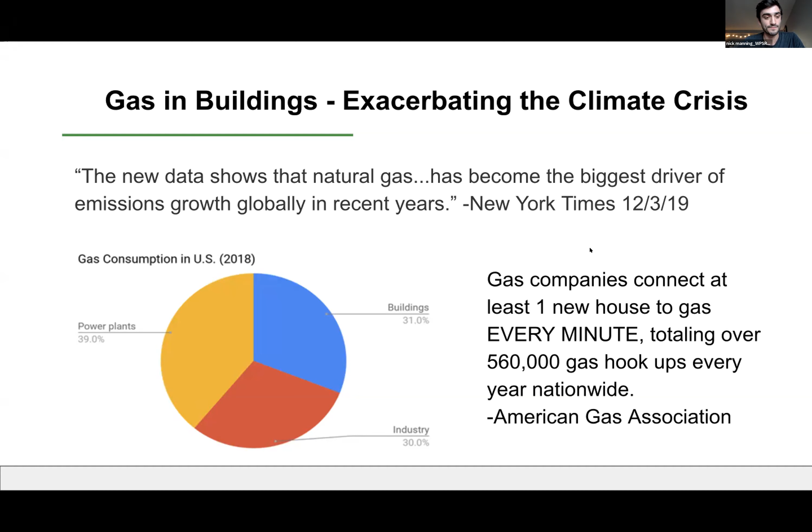In Washington specifically, thanks to our clean and low-cost electricity, swapping out gas appliances for electric ones would be a huge climate win. Reducing the average household's climate footprint by 50% if we swapped out gas appliances for electric appliances is the same as completely giving up your car. So you can contribute to the solution as much as totally giving up your car by switching out the appliances in your home, in Washington specifically, because we have access to a relatively clean and low-cost electrical grid compared to the rest of the US.

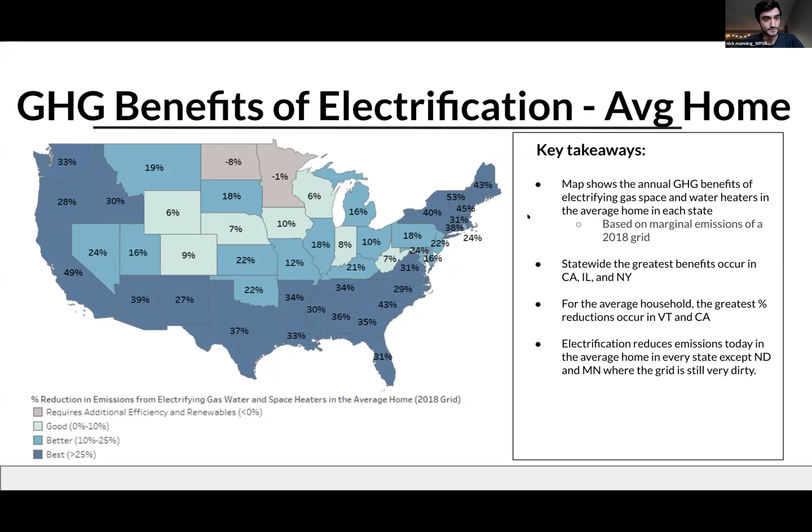Zooming into Washington a little bit more specifically, looking at the trends of gas use in this state, and why it's kind of alarming how quickly the use of gas is growing in the state and the total portfolio that it makes up as a percentage of our total use going into buildings.

In Washington state, you can see on this graph that buildings are the single fastest growing source of carbon pollution, up 50% since 1990, now causing 27% of Washington's climate pollution, which is more than the industrial sector, which is 19%, as you can see on the graph there.

I will note, this comes from gas burned in furnaces, water heaters, stoves, and dryers. So due to gas use in those appliances specifically, we are contributing 27% of our climate pollution by just gas appliances in buildings, and it's growing faster than any other source of climate pollution in the state.

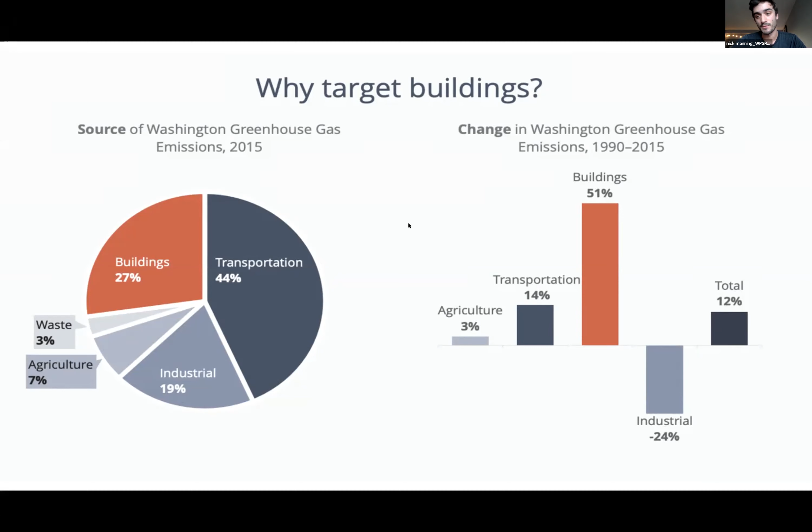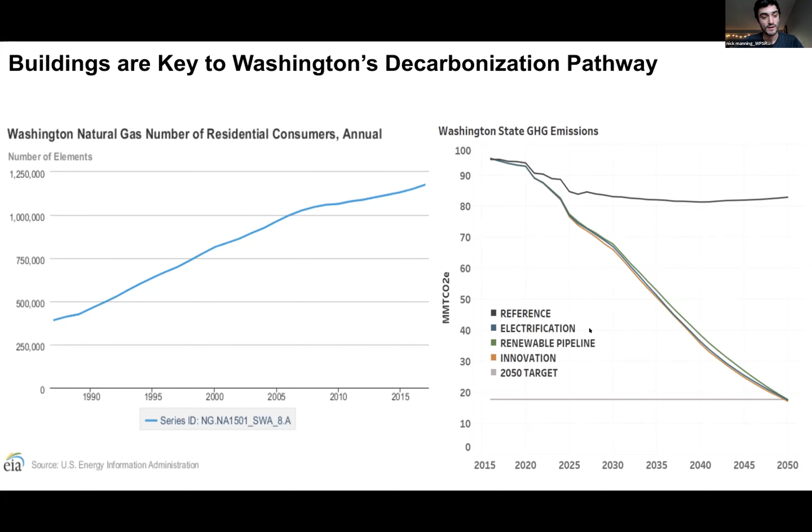Specifically, reducing the residential sector's use of gas by 85% is the target to get to where we need to go as a piece of the larger climate decarbonization pathway in Washington. This is a huge piece of the puzzle that needs to get figured out soon if we're going to keep on track with what we've promised.

Next, please. And that's the climate picture in a nutshell. There's a lot more I could say about that, but I don't want to harp on it. I'm sure you guys are getting information from many sources.

So I think I'm going to pivot and talk about what we do as Physicians for Social Responsibility, as an organization that organizes health professionals. We're really concerned about the health impacts.

There's a growing body of literature, and it seems like new stats and studies are coming out weekly, attributing really concerning adverse health outcomes to increased use of gas indoors and indoor air pollution. In the United States, we estimate that air pollution from buildings specifically contributes to $205 billion in costs annually. That's healthcare costs, lost work days and sick days, all the different impacts that come from being overly exposed to indoor air pollution that might make you sick, make you unable to work. All that aggregate is 205 billion annually, which is an enormous overlooked piece of this issue, I think.

And if you go to the next slide, we see that premature deaths attributed to air pollution from buildings are estimated to be over 18,000 annually. So homes and buildings are now the largest source of toxic air pollution in the US, and it's linked to a greater number of premature deaths in 2018 than either the power or transportation sectors, according to a study in Nature.

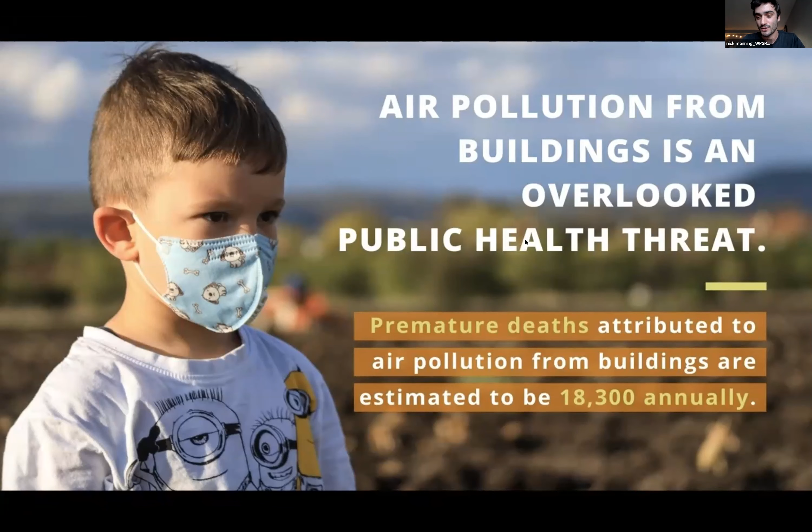By the way, if I say anything that folks would like to follow up on, if it sounds crazy or you're wondering where it's coming from, I have references for all these. Please feel free to follow up, and I'm happy to tell you where I'm getting my numbers and where this data comes from. I've got resources to share if you're curious to get more into the weeds about some of the actual data. But I say that because of how concerning and outlandish this sounds, that buildings are now killing more people annually from indoor air pollution than either power generation or transportation. Transportation has been the big piece that we've been trying to fix for years, and this has kind of sneakily overtaken it in terms of cost to human health and human life.

Next slide, please. So I'm going to turn to gas stoves specifically. There's 3 appliances that we're really focused on: gas stoves, and then space and water heaters. So I'm going to talk about gas stoves first, and then I'll do a little bit on space and water heaters.

But very quickly, we found that emissions from gas stoves include that whole list you can see in the box above the gas stove on the left: nitrogen oxides, carbon monoxide, particulate matter, ultrafine particles, formaldehyde—all chemicals that have been linked to really dangerous health outcomes in people, and they're listed here. I won't bore you by reading all of them, but we're talking about very serious heart and lung conditions, very serious brain conditions, especially in kids and the elderly.

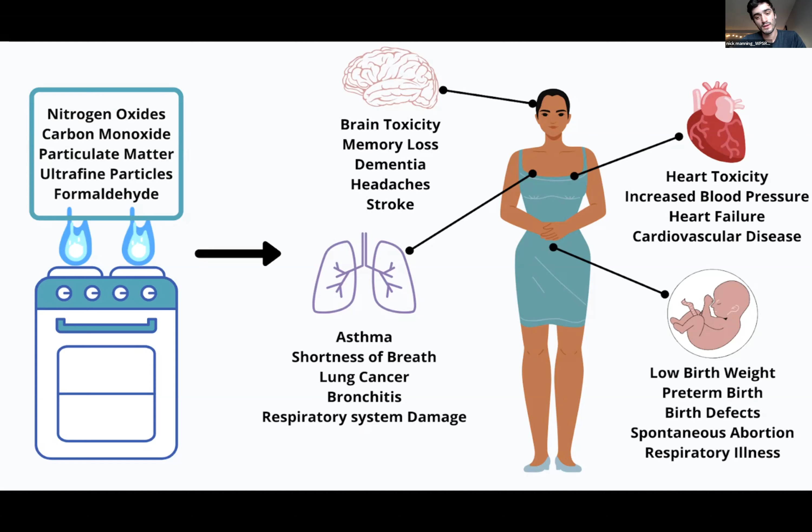In fact, homes with gas stoves have 50 to over 400% higher nitrogen oxide levels in their indoor air than homes with electric stoves. And nitrogen oxide has been linked specifically to heart failure and asthma, very empirically. I'll get a little bit more into that in a second. But then the stoves also emit carbon monoxide, which obviously is a huge problem. Carbon monoxide is an incredibly toxic chemical that we don't want anybody breathing in their home, and it's coming from your stove. So next slide, please.

We are not paying as much attention to indoor air pollution as outdoor air pollution. In fact, levels of indoor air pollution can reach concentrations that would be illegal by EPA standards outside. That's regularly documented, largely coming from gas stoves. We know the risks. We've well documented the medical pathways from exposure to outcome, and it's especially damaging to children, lower income households, anybody who's immunocompromised, and aging populations. Two last pieces: ventilation is critical, but really what we need is electric cooking to transition to something safer and friendlier to the climate, so we're not putting people and our environment at risk.

Ventilation is a piece of it, but we found that to really get at these impacts, it requires swapping appliances to electric appliances.

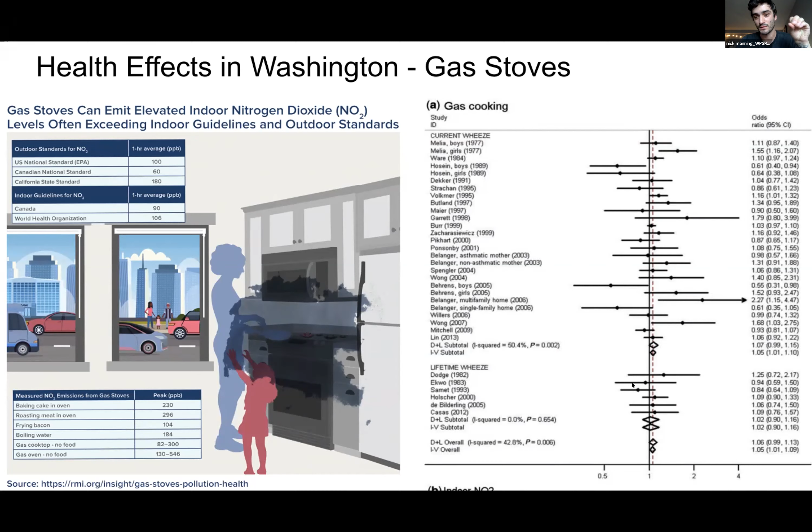I should mention that data includes gas and wood smoke being 20% of the total making up those figures. That's still a huge number. It's extremely concerning as far as premature deaths go and the cost of human life and human health. And we're not really doing anything about it from a policy perspective, specifically in regards to protecting the health of our kids.

Moving to space and water heaters, less documented than gas stoves. A lot of data and clear causal pathways have come out of studies specifically regarding gas stoves. For space and water heaters there's more limited data, but I found 2 case studies that might be interesting. In South Australia and in India, there were 2 deaths from carbon monoxide poisoning traced back to faultily installed water heaters.

In fact, in the 2 individuals studied in this case study, they had carbon monoxide levels of 55%. The normal level is about 2 to 4; 50 can kill you. This happened because the water heater, which operated on a pilot light, was improperly installed—it was switched off, but the gas wasn't totally turned off, and that leakage over time released carbon monoxide into these individuals' homes until they reached a fatal level and died.

So clearly there are risks associated with all gas appliances that we need to consider. Just having gas inside, the indoor air pollution, and not looking at the consequences as closely as we should is a really big concern for us, specifically at WPSR.

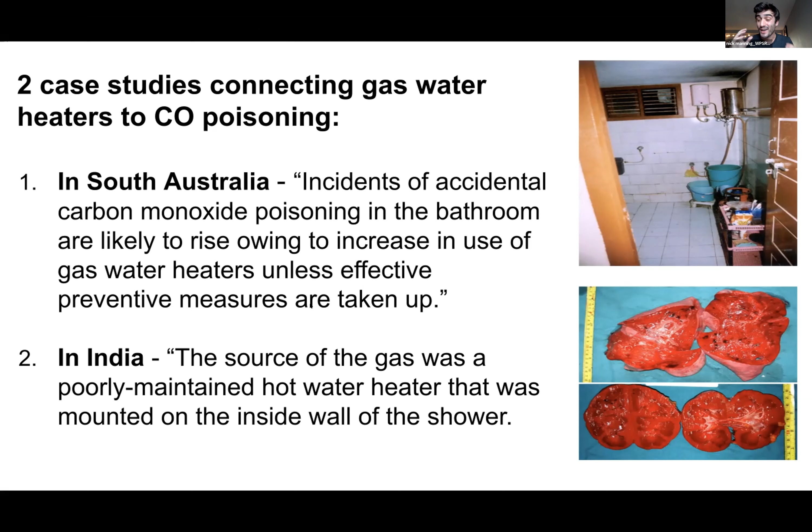And that's sort of the health data. There's more, and I'd love to talk your ear off for as long as you'll let me about how many adverse health outcomes we're associating with gas stoves and water and space heaters, but I'll leave it there. The real takeaway is that this is now contributing to more health impacts than any other sector in our state, from any other fossil fuel in our state, and is growing faster than any other sector in our state, and is largely unregulated as of yet.

With that, I'll give it to Dylan.

Thanks, Nick, for that very sobering overview of the health impacts. It's pretty astonishing. As a renter myself who lives in a house with a gas stove, learning all of this has been kind of terrifying, and I think it's illustrative of the situation a lot of folks are in our region, which is not having the ability to transition away from gas, even though we have an understanding of the climate and health impacts.

I'll talk a little bit about some of the policy levers for that shortly, but I want to first start talking about building electrification and what it looks like. So we've heard about all the negative impacts of using gas in buildings, to our climate and to our health, and we've heard a lot about the oversight from our different levels of government about regulating these appliances based on those impacts.

But there are some really effective means by which to reduce emissions, protect health, and even save households money. So building electrification is a growing movement, as I'm sure many of you know, and many of you are at the forefront of it.

This graph is just a helpful illustration as to where a lot of the gas in homes is being used. You can see that while cooking has an outsized impact on health, it's really a very small percentage of the carbon emissions related to gas appliances, whereas space heating is the vast majority, followed by water heating. This is a helpful graphic, especially as we start to talk about some of the policies that cities have taken in light of the carbon impacts of gas appliances.

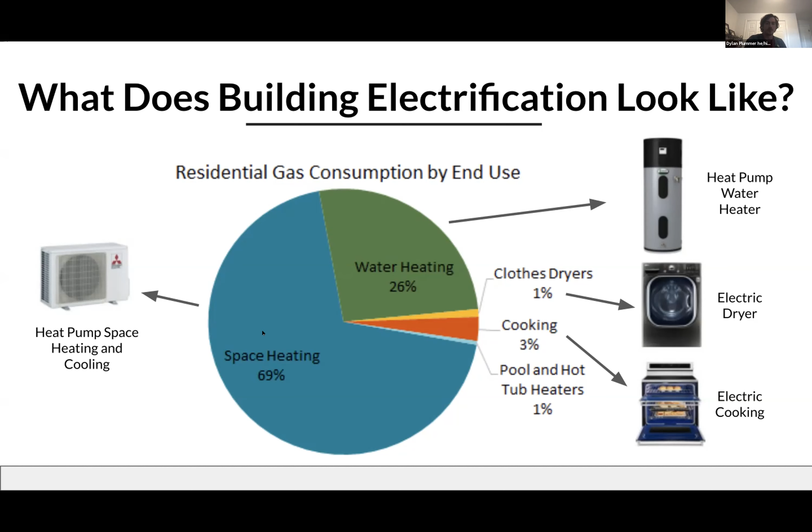This is actually something the presenters coming after Nick and myself will likely speak much more articulately to, but all of the alternatives to gas appliances in homes, ranging from induction stoves, heat pumps, and electric water heaters, are becoming increasingly inexpensive and efficient, making the transition away from fossil fuels in buildings that much easier, not only for clean energy enthusiasts, but for folks concerned about their health and safety from these gas appliances.

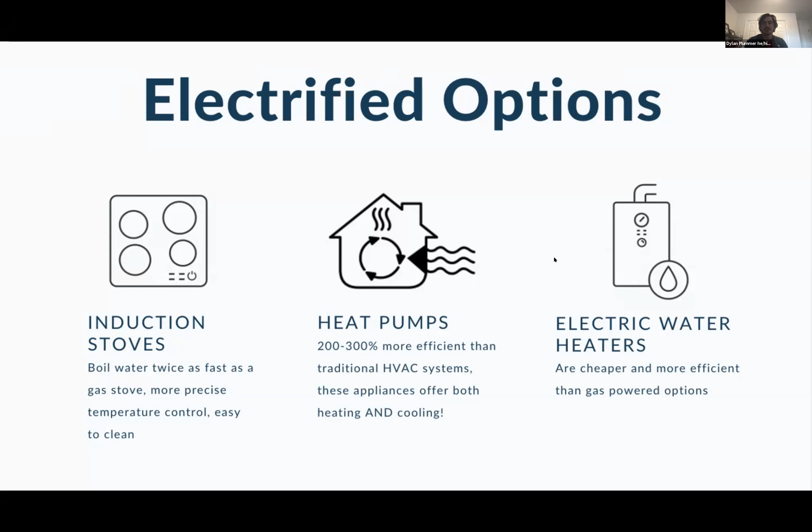We've heard a lot about how there's very little regulation, but there is a growing movement specifically across the West, and now increasingly across the country and the world, to take on the gas industry and take on these gas appliances that are polluting our homes and our climate.

Just recently, in the last few years, over 45 cities have adopted all-electric building codes. That all started when Berkeley, California passed regulations on building with gas hookups in new buildings. Within two years, dozens of cities in California, cities in Washington including Seattle, and cities like New York City and Denver, all took measures to put limitations on building with new gas infrastructure and incentivizing using electric.

So 11 states plan for building electrification to help achieve state climate goals, including Washington and Oregon, which is really exciting. As Nick mentioned, the 2019 Clean Buildings Act in Washington was a great step forward, as was the executive order from the governor in Oregon to limit emissions. There are 11 states working towards building electrification in multiple venues, including their public utility commissions. Both Oregon and Washington are now engaging, or about to engage, in fact-finding about the future of gas for their public utility commissions. So that's really exciting.

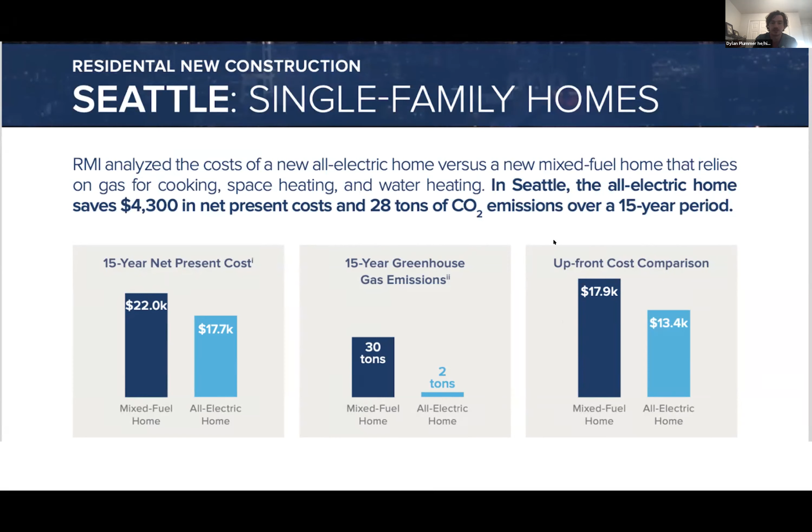I also wanted to point people's attention to this Rocky Mountain Institute study on Seattle, which I believe came out in 2019 or 2020. It looks at the 15-year savings, and shows that building electric can save a homeowner $4,300 in net present costs and 28 tons of CO2 emissions over a 15-year period, which is really significant. So not only is electric building the safe and climate-friendly choice, but it's also a good choice for the pocketbook.

And I did want to just hit on this. I know it's a little bit of a tangent, but it's always worth talking about.

The gas companies are selling us this false promise of renewable natural gas, RNG, biomethane, and sometimes green hydrogen as well, but that's a little less common, saying that they're going to be climate friendly in the next 10 or 15 years because they'll have replaced all of the gas in their pipelines with biomethane, which is generally generated by polluting infrastructure like landfills, water treatment plants, or even CAFOs, mass animal agriculture places. And there are many studies that show there's no way to even come close to hitting a third of the current demand for gas with renewable natural gas.

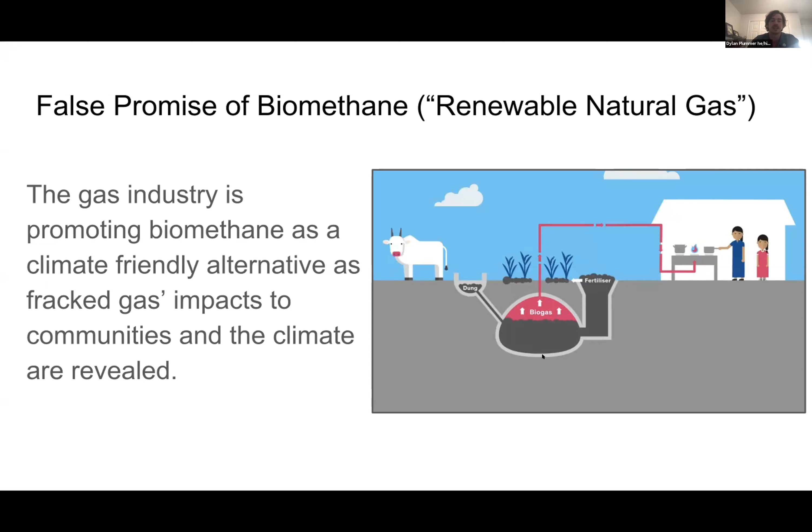It's incredibly expensive, and there are a lot of environmental justice concerns. But what we know is that the gas industry is not really interested in pursuing renewable natural gas as a viable alternative. They're just interested in using it as a pretty distraction for policymakers while they continue to expand their gas infrastructure and expand their sales, locking us into an out-of-control climate crisis and public health crisis, as they have been for decades now.

So despite what the industry would tell you, the fastest, most equitable means by which to decarbonize our society is not to invest in more CAFOs, sewage treatment plants, landfills, et cetera, but instead to electrify everything and transition to clean, renewable energy in our homes.

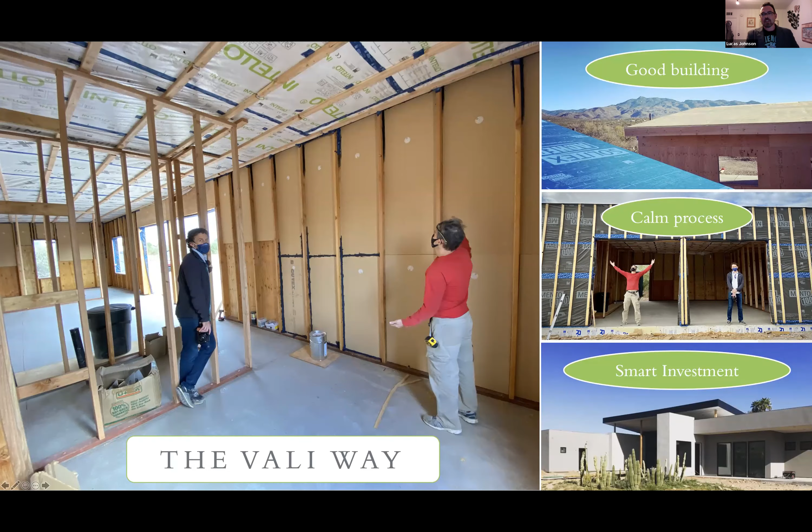Good building, what is that, you ask? If you haven't seen this before, we've broken it down to 5 factors that have a ton of different sub-factors. But effectively, we're in the decision-making processes that we've done. We're looking at comfort and health, efficiency and renewables, durability and resiliency, social equity and embodied injustice, life cycle carbon impact.

Those are the 5 main things we're looking at in decision-making processes we've done. This has been a powerful methodology, so we're hoping to turn this into an open source design tool that anyone can use through my relationship with the Guild and all that. Hopefully this can become a Guild product. I hope to share this system, this thought process, because in 20 years of doing this work, I haven't found a conversation tool that's more effective in getting people to see the whole system and make the right decisions.

So I decided to apply it to cooking, a conversation we have all the time with clients. It feels like stoves are the last bastion of gas inside homes. People are like, I'm a cook, I have to have this gas stove. And it's like, really? You don't. It turns out most cooks are moving towards induction anyway.

But there's also a whole horrible life cycle you're tying yourself into by choosing to have gas in your home. A lot of people do all electric but a gas stove. Cool, step in the right direction, but you're still tied into this system. I chose this dangers of fracking image because it was the scariest looking thing I could find. But my point is, you're inextricably tied into a system that has tremendously high carbon impact.

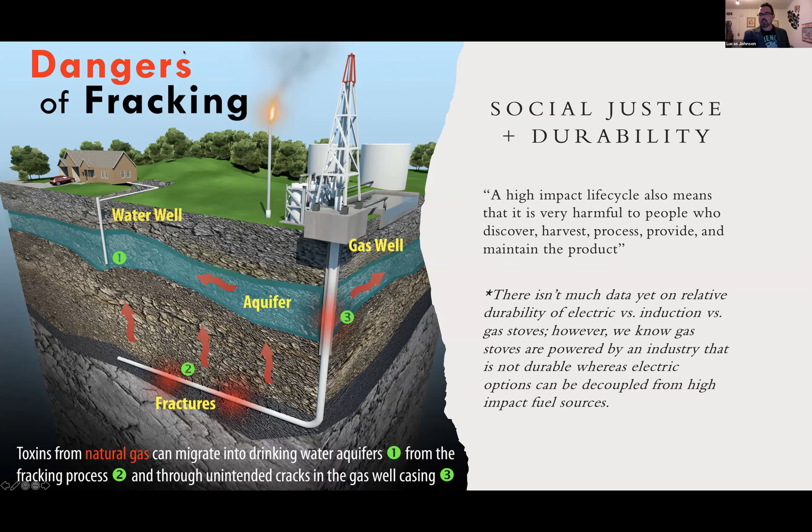Health-wise, natural gas decreases overall indoor air quality. Thank you so much, Nick, we're going to need to talk. I'm fascinated by learning more about the data you have on this. It's kind of hard to find a lot of publicly available data in this area, but it's very clear that natural gas is adding pollution to your building.

If you go camping, you're using natural gas basically in a stove that says do not light this indoors. Yet we put a giant, 300,000 BTU Wolf massive stove in our house that requires a ventilation hood that could suck a cat off the ground in order to remove that amount of pollution, and think that we're doing something worth doing, that's safe, that's healthy, that's good for us. It's kind of a crazy thing.

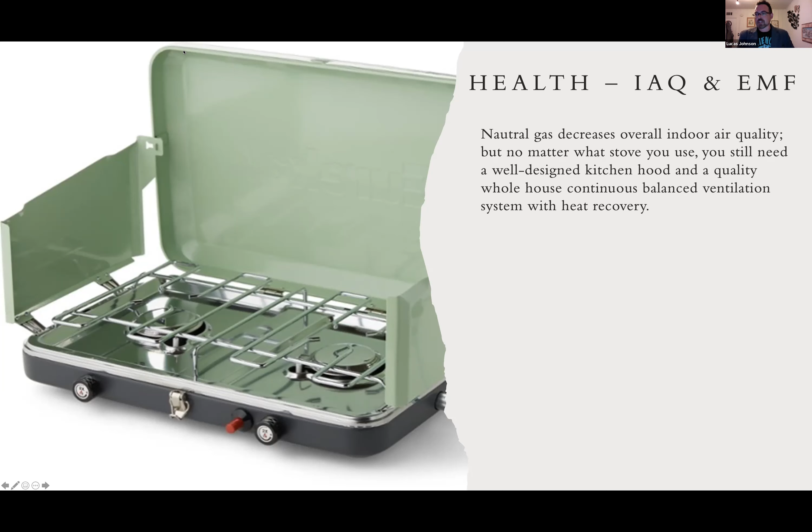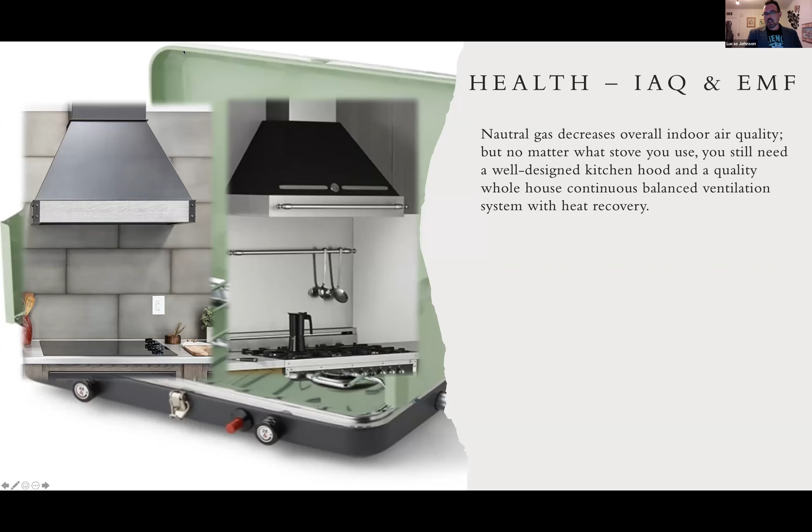But what the data shows is that no matter what stove you use, electric, induction, or gas, what you do need is a well-designed kitchen hood and a good continuous whole house balanced ventilation system, ideally with heat recovery, so we're not wasting a bunch of energy to create good air quality. What you can see here is that the kitchen hood looks almost identical in either of these setups, with a gas setup or an electric setup. You still kind of end up with effectively the same utility.

There are some emerging concerns about induction stoves and the degree of EMF they put off. Everything I've found was not really sufficiently scientific, is the way I'd put it. But there are some good points to consider about exposure to EMFs in general, especially as we move towards electric houses. A stove's a large appliance, it's going to have some degree of electric power, and that can be bad for us. But is it really that bad? And is it worse than any of the other options we have?

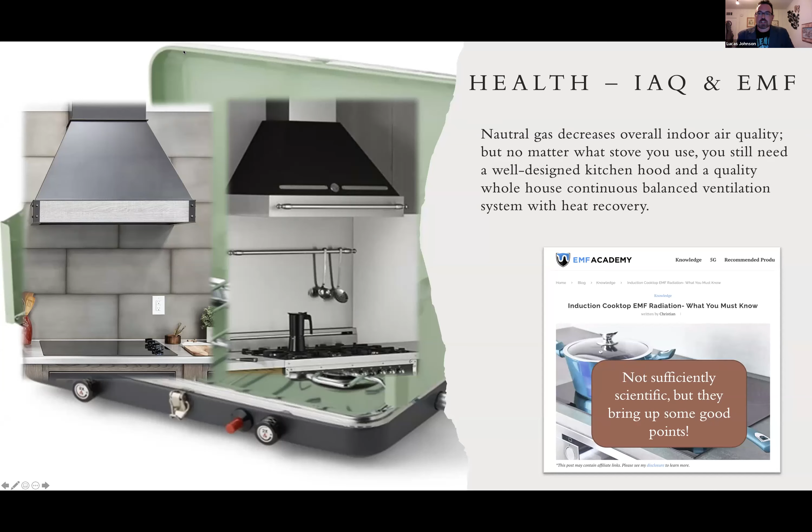Interesting things to think about. And comfort, another one of the things we always consider. These are thermal images from my mom's house during the heat dome when it got to over 90-degree air temp inside her house because she doesn't have air conditioning. Just trying to stay cool was a very, very challenging thing.

But she'd actually just switched to an induction stove, which she loves. She's very passionate about cooking. She views induction as an upgrade she did purely because she prefers to cook on it. But it turns out we could also cook comfortably on it, even when it was over 90 degrees inside, because the stove isn't putting off a ton of heat.

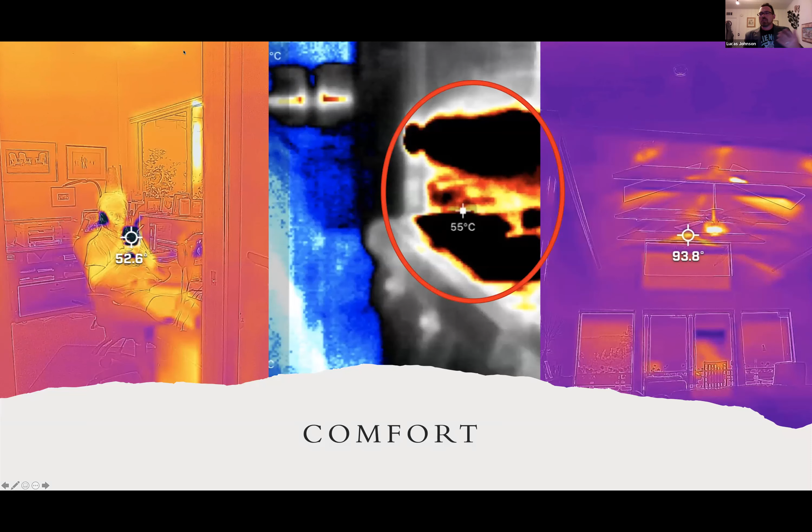This image in the middle, this blurry craziness in the front, that's a gas stove putting off a bunch of waste heat. Not great. And all of the pollution and other stuff coming off of it, all the horrible air quality, all the life cycle violence you're tied into, all of that. It's kind of an appropriate looking thing. It looks like a furnace or something.

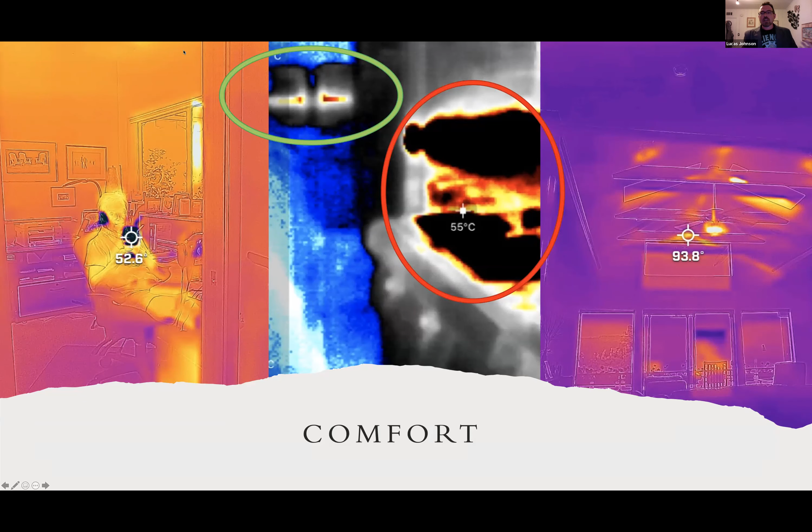In the back, that's an induction stove operating to also cook food. And it just goes to show the level of waste heat from the two different things. If we look at waste heat as an indicator of modern technology advancing, clearly the induction stove is part of a modern good building.

They're also quite expensive. You can find less expensive ones. I've had a really hard time finding a lower cost middle market one that's good quality and well reviewed. If you find one, please put it in the comments, let me know, because seriously, that's the next thing we want to buy.

There's also a great way to get started if you don't have the budget to drop like $8 grand on a stove, which I certainly don't. You can get an induction hot plate, a little thing you plug in and start cooking on it. And these things are getting incredibly sophisticated. I was cracking up earlier when I found one controlled by Bluetooth with algorithmic settings for different meats and temperature sensors in the pan. It's kind of fun where this technology is going and what it opens up for cooking options, because I'm very passionate about my food and cooking, and so is my wife.

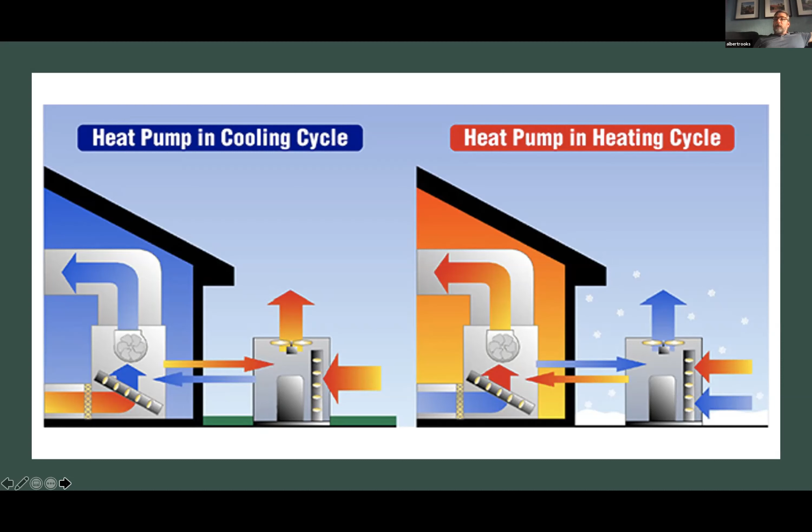It's blasting it out the top of the unit through that chimney across the fan. So you've got a little air cycle of the red arrows running in the cooling cycle, ambient energy coming in and going out the top, while a refrigerant gets pushed to the inside and pulled back on the outside and goes through an expansion. And there we go - we can provide lots of heat without burning any combustion gas, and we can cool homes. So that's really the trend we're looking for in electrification, and we can do most functions in a building using this basic refrigeration concept.

When we talked about this meeting, I was asked to talk about it from a personal standpoint, so our company began becoming interested in taking on a number of heat pump products. We took on a new line that is made in China by a company called Midea. This is just kind of context for why we're doing what we're doing and what products people can choose to use.

There's lots of really good ductless mini splits - lots of great ones by many, many companies. The one thing I like about this one, the reason we chose to work with it, is that outlined in red.

That's an efficiency rating in a cooling application. And below it, where it says 14.5, that's an efficiency rating in a heating application.

Usually in the industry, when we look at ductless mini split applications, really good ones, we'd see that number would be more like 22 or 24. So when that turns into a 40, that's really, really high. That basically means we'll need a lot less electric energy to do the same amount of BTU.

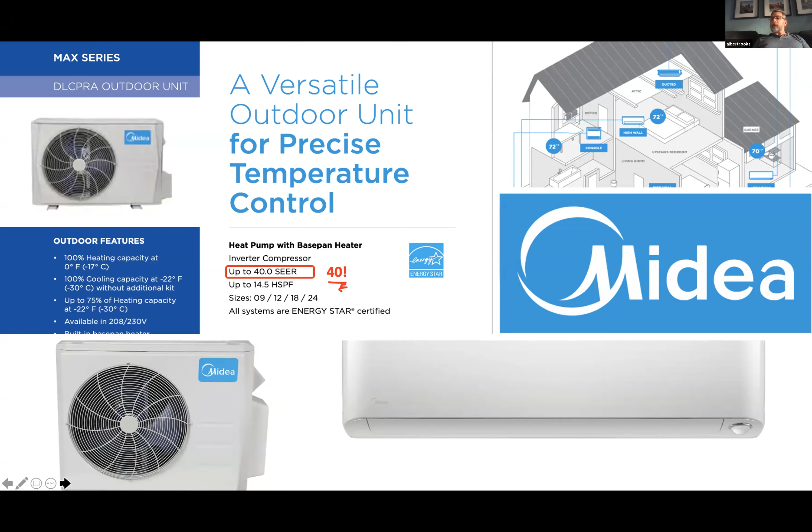There's transitions going on with the refrigerants that are being used, which brings me to the next one. This is one we're just onboarding right now. This is a company from the East Coast USA called SpacePak, and I'm interested in 3 of their units.

The 2 units are shown right here. I'm interested in these because usually these kind of North American R410A monoblock heat pumps, like SpacePak, Chiltrix, or something like that, generally don't have inverters. They're a little bit power on and power off, so they're not really very good at feathering the loads in and out.

This is a really good, efficient inverter technology. This particular series of heat pumps will work in very cold climates, much colder than we'd experience in Western Washington. They'll work fine in Eastern Washington, and even in a colder area like Northern Idaho, where it gets really quite cold, there's even a colder climate option also.

So the last one we looked at is a mini split. The way these mini splits work is we run a whole bunch of piping around the house carrying the refrigerant, and that's what delivers that transition. This is much like the next heat pump we're going to look at, which uses water as the refrigerant line.

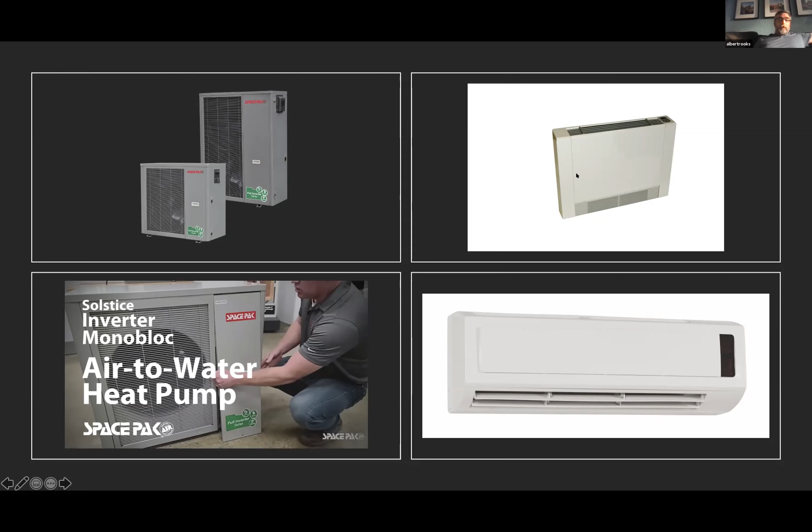So we're not running this high global warming refrigerant around the house, and it still does all the basic functions of a heat pump, delivering over here with a high wall head or a fan coil on a low wall over there also.

Next thing we're going to look at is really the Sanco2 water heater. This is really one of the early products that we started with. It's an exciting product, and it's capable of heating all the domestic hot water for a small single family home. You can also heat a very small home while making all your domestic hot water.

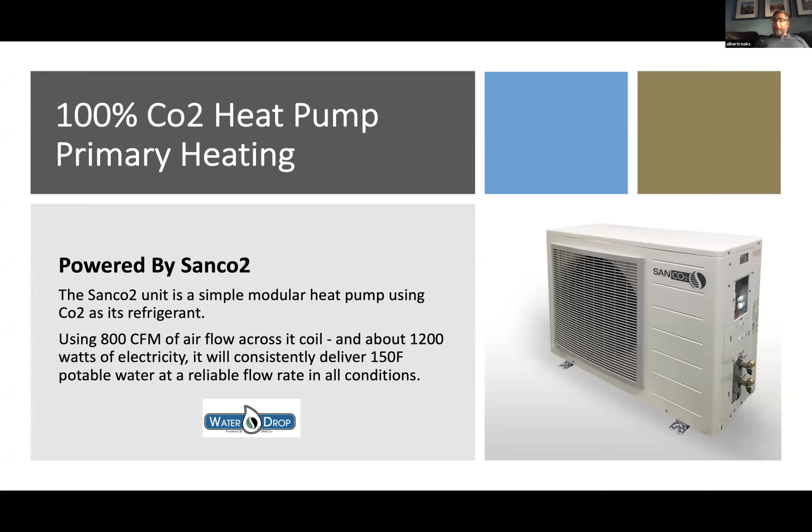But the cool thing for electrification is that through a few years of research with Bonneville Power Administration and Ecotope in Seattle and a bunch of utilities in California, we've managed to find a way to gang all these water heaters together with some very large tanks and take on all the domestic hot water of very large buildings.

Here's one in downtown Vancouver, British Columbia, Canada - a 27-floor office building that we just switched from natural gas over to this heat pump cycle. The nice part of this is that we can handle single family buildings for space heating, water heating, and also handle very large buildings, all with heat pumps. Heat pumps are really very simple devices, and we've got some really good tools to work with.

How about if I turn it over there, Nina? Oh, sounds great, thank you so much, Albert. That was awesome. You're welcome.

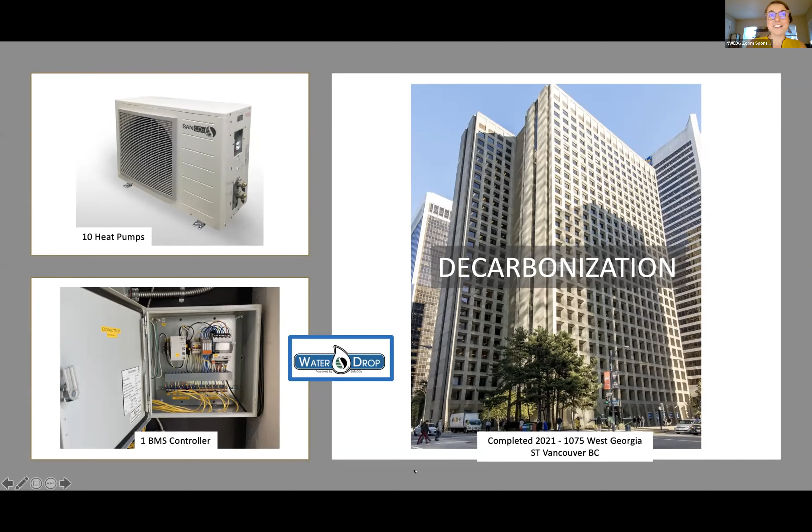Nice. Awesome, John, your slide looks good. I just don't think we can hear you - are you unmuted? You talk, there you go. Okay, and then my presentation slideshow... In the beginning, there we go. Okay, I'm good to go.

Thank you everybody. I'm giving two different presentations. The first will be about holographic and non-holographic electric fireplaces and stoves. This presentation was actually prepared by Brian Cloward, an architect who has a passion about it, but he unfortunately was not able to attend tonight, so I was gifted this presentation this afternoon to present. I'd never even heard of electric stoves and fireplaces that are super sophisticated and actually holographic until we started researching for this meeting - it's a very interesting type of thing.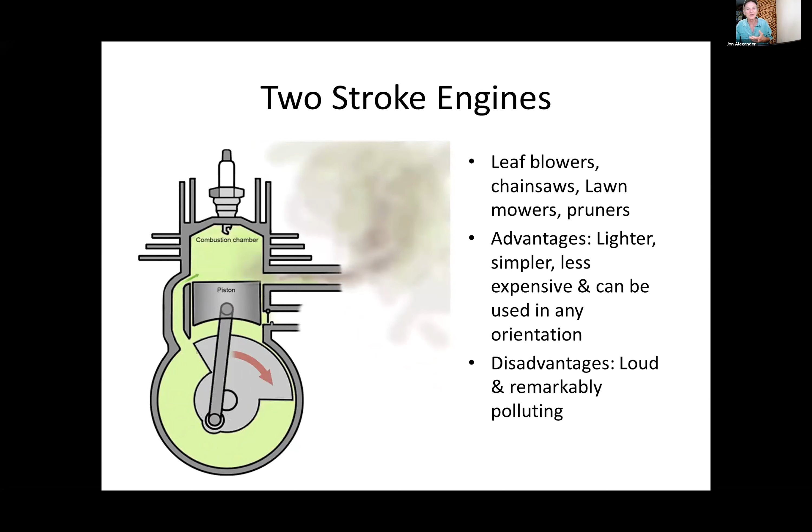Very inefficient. So when we get into electric leaf blowers, here's my show and tell. I have my little electric leaf blower, which has some sound to it for sure. Since I have many different Makita tools, it works super well.

I bought it for the job for cleaning out table saws, but it's become very useful at home for cleaning leaves off sidewalks and stairs and things like that. In fact, it's become so popular it may not make it to the job, but we'll see.

It's been an amazingly useful tool for blowing around leaves at home when I'm too lazy to rake, or blowing sawdust around the job site when I'm trying to clear off an area, or blowing sawdust off a worker when they're cleaning up at the end of the day. Many different uses.

You can get seated lawnmowers, you can get ones that are corded like mine - I like it because it's so lightweight and easy to turn on and off - or you can get battery pack ones as an option.

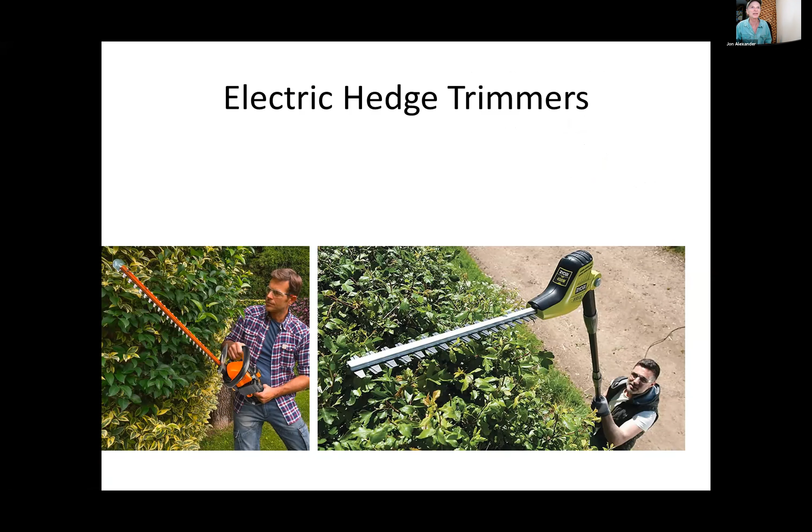Hedge trimmers - lots of different hedge trimmers that are all electric, either corded or battery powered. They work very, very well. You can also get little edge trimmers that are electric and work well.

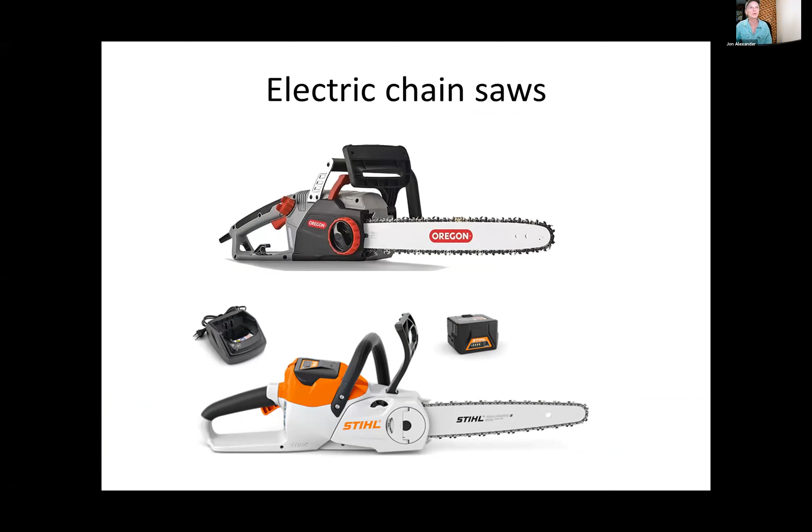Chainsaws - we all hear the two-stroke chainsaws around our neighborhoods that are bad polluters and loud as heck. Well, electric chainsaws work pretty darn well too, either battery packed or corded. This is my Sawzall - I use this trimmer blade, which is super sharp and works great for cutting. I cut a branch on the job that was 6 inches in diameter today, and it just zipped through it pretty fast - not as fast as a chainsaw, but it works very well.

This Sawzall is just as powerful as my corded Sawzall and works super well for many different trimming projects at home and at the job. Then there's pole saws, many different types of pole saws and remote trimmers that you can get that are all electric and work very well.

This excavator is huge, something the Norwegians have been using quite a bit. They're incredible pioneers in the use of electric tools and electric vehicles, having the highest penetration of electric vehicles of any country in the world at this point. So that's just my quick synopsis of electric tools for landscaping, and I'm ready to go on to the next speaker. Thank you. That was wonderful, Jon. Thank you so much.

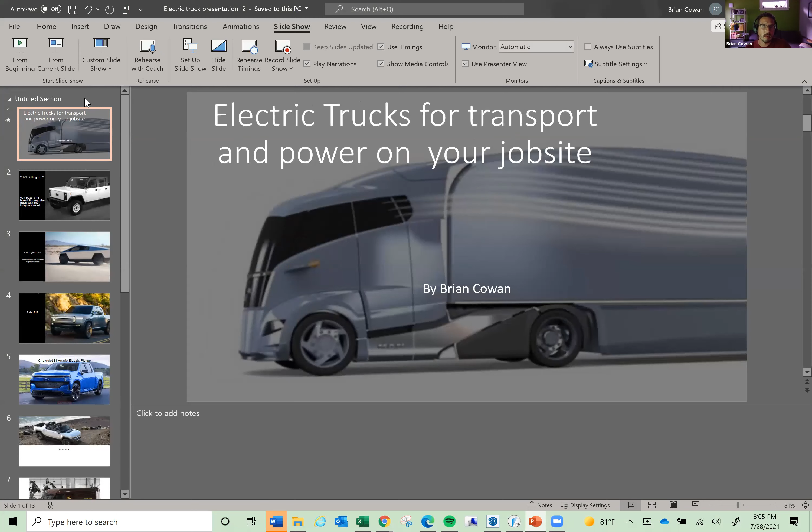Can everyone see that? Okay, yeah, so there's a lot of really neat information out there about electric trucks. I spent mostly just a lot of time on YouTube. There's kind of equal parts fact and speculation about what some of these vehicles are going to be and what their features are going to be. But I just wanted to highlight a couple really cool things about a couple neat vehicles. Anyone could spend a lot of time doing a deep dive on YouTube to really see what all is out there.

So the Bollinger B2 is a pretty exciting one. One unique feature is that you can actually pass a 16-foot board through the truck with the tailgate closed. A lot of these cars have been reconfigured to have storage compartments in the engine bay, and this truck utilizes that along with the tailgate and the whole car to be able to put something really long in there for transport.

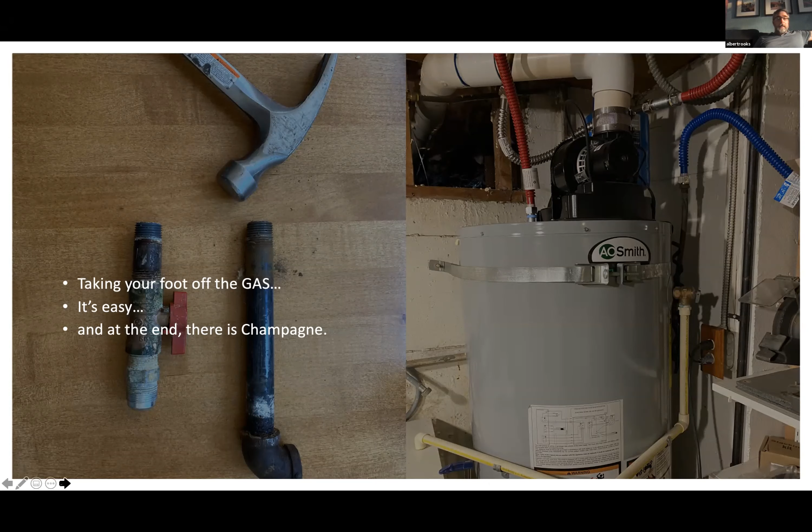So just a quick share on that for me - I really work a desk anymore, this is super easy. I just started replacing the appliances, and I kind of work with water heaters and stuff like that, but I'm just not that great. I wouldn't hire me to install my water heater, I'd get somebody way better than me. All I did was work through the applications, and that was the water heater on the right-hand side of your screen, and on the left-hand side was the little gas valve behind this gas range.

So in this particular circumstance, the house already had a central heat pump that had replaced an original oil burning central heating system. And I wound up removing the central heat pump in favor of a more efficient heat pump strategy, and was able to reuse the ducting after removing the heat pump to run ventilation tubing to deliver fresh air and pull air out of the bath and things like that, in the way that they were talking about after the Harvard studies earlier in the top of the session today.

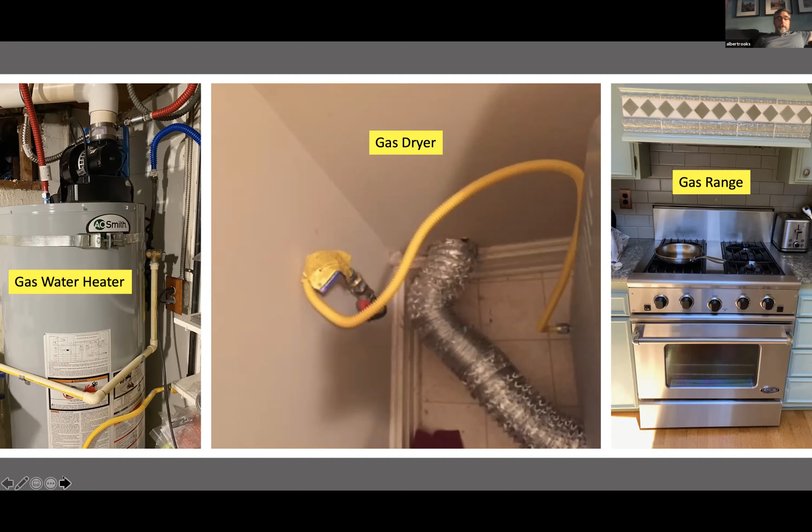Also, the Harvard studies really did talk about gas cooking, which is really why we made that change, and to be able to remove the meter at the end of the project. We wanted to remove the water heater with a heat pump water heater, because I've worked around those for quite a long time. There's no more reason to have a gas dryer from a building envelope standpoint. Even in a really old building like mine, a gas dryer has that duct going out through the wall. It's a vented dryer. It's just the worst idea in a building, because that's a 4-inch hole in the building. New buildings and theories about airtightness and lowering the loads are all about airtightness, so it's great to get rid of these.

What I replaced them with was really pretty simple. Heat pump water heater—there's lots of different styles. It could be this one, or it could be 2 or 3 unitary styles that you can find at Home Depot or your plumber can get for you. The center is my second heat pump dryer, and it's the second one because this is kind of the second house I've retrofitted and moved to heat pumps.

On the right-hand side, there was a little discussion about this one. I got this at my local appliance shop, just a family-owned business, and I got it because it had those knobs that look like the old gas cooktop. It was $3,600. The first one I got, I think we were trading chats in the channel with George—the first one I got was great, and it's still working great in the home it's in. I got it at IKEA for like $1,100-1,200 or something like that. All you do is get the appropriate cookware, which has the right quality of steel to make the induction activity work. I don't know how to explain that quite well, but it works really, really well.

Somebody did ask about total kilowatt hours of an induction range. I can't speak to that, but in this last project, the house was fully metered. When I boiled water, frying an egg, I set it on medium high and it was burning 500 watts of electricity for the duration that I was cooking, which is super low, right? An electric resistance would be using way more than that. And gas, of course, is going to be producing a lot more heat, and we're going to be breathing the combustion gases, and we're using a fuel that we really, really need to get out of.

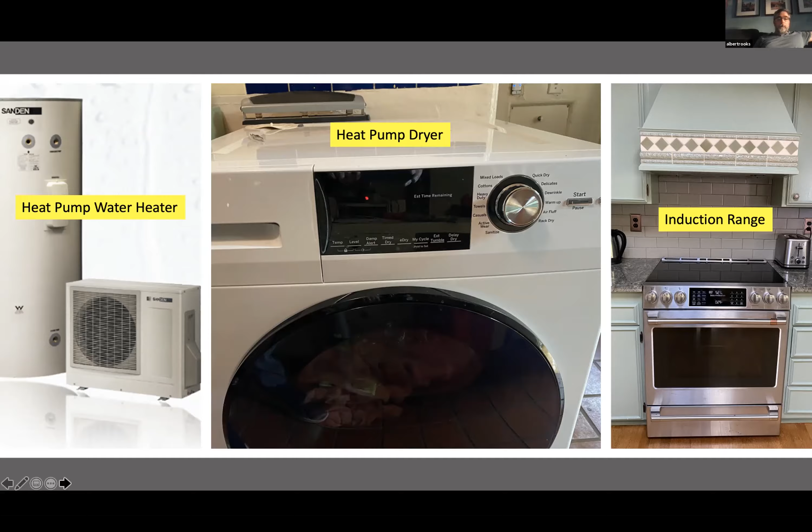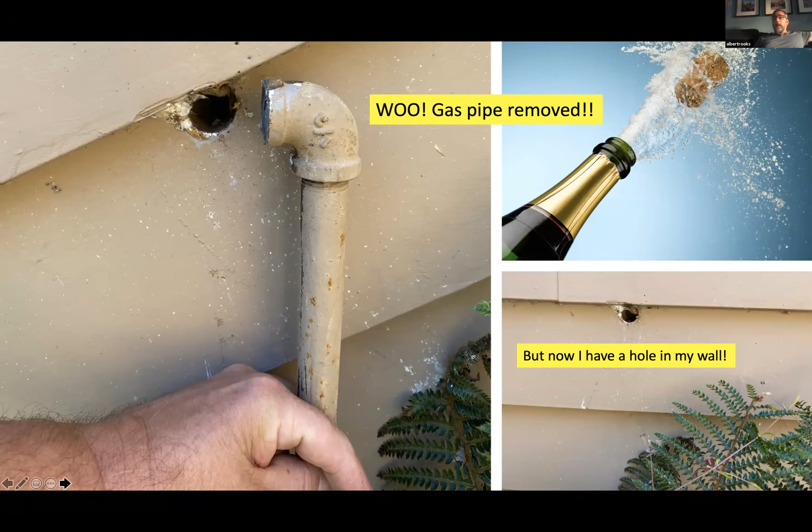So in the end, this was super doable for me. I had an addition, so they ran the gas pipe on the outside of the house to get to the gas range, drilled a hole through the wall. At the end, there was a little celebration because I had removed most of the gas, but also the champagne that we literally uncorked—I used the cork because it fit the diameter of the hole in the outside of the wall perfectly. Drove it in with a hammer, my hole in the wall sealed, using the champagne cork. And boy, you got more holes, open more champagne. So anyway, that's it for me—one more appliance to go, and then we'll remove the meter.

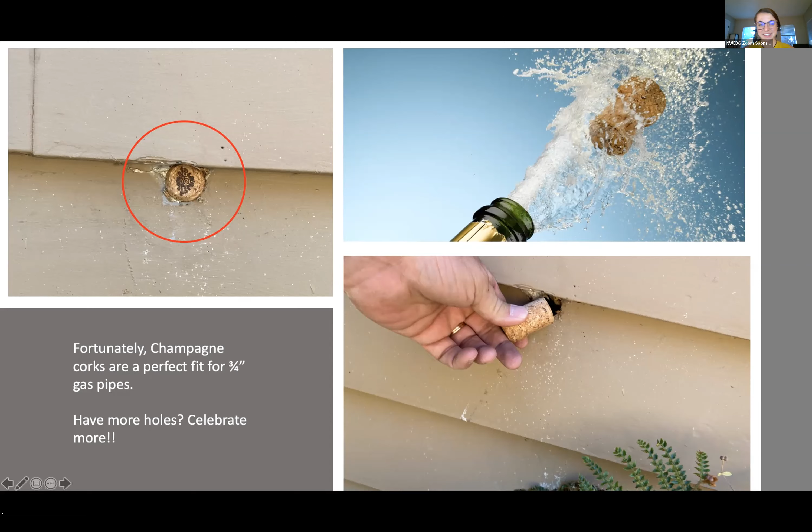Most welcome. I love your champagne cork hole. I was really, really happy with it too. I like cork, I've got a long history with cork, so anytime I can use cork is fun. Thank you, that is wonderful.